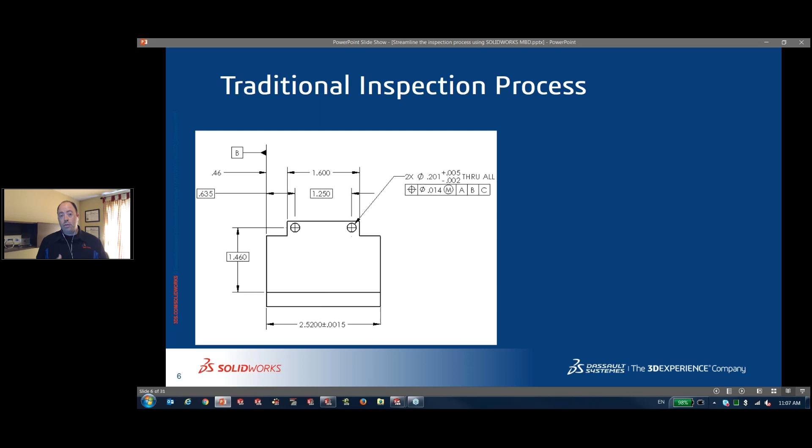So let's start with the first things, which is the traditional inspection process. Now, what does the traditional inspection process look like? So let's say I have this drawing, this 2D drawing, and I want to create a first article inspection report to do the inspection of this document.

So the traditional process is that we're going to go ahead and balloon the drawing, mark up all the dimensions that need to be inspected. I'm going to likely pull out an Excel spreadsheet, start transposing those balloons into the Excel spreadsheet. Then I also need to fill in the nominal values indicated on the drawing, but then I also need to calculate what's the upper and lower limit for each of those dimensions and values.

So now, I've done this for this single view. Mind you that you have to take care of the whole drawing as well. So I've done this for just a view of a drawing. Now I have to do this for the whole drawing.

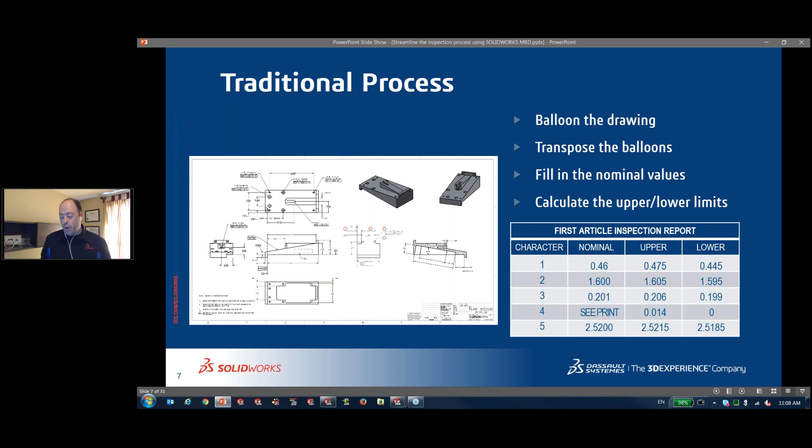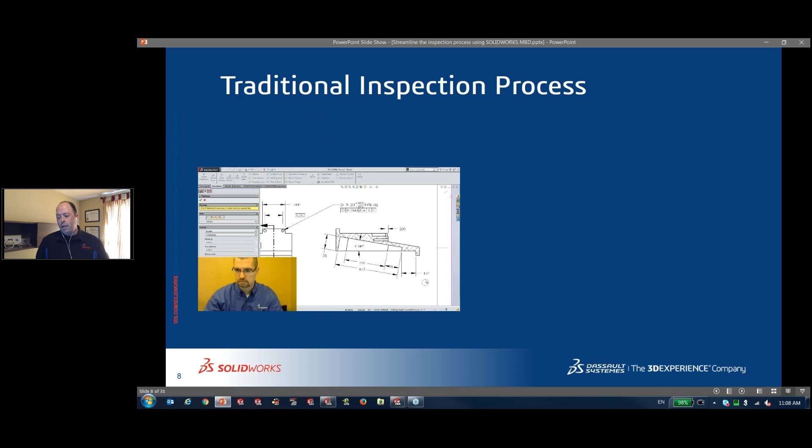And in fact, if you're doing this traditionally and using the traditional manual process, it actually might look like this. This is actually one of my colleagues, Steve Fick, that actually filmed himself doing this process the good old way. So he's inside of SOLIDWORKS, and he's going to be adding balloons manually.

Fast forward a bit, jumps into Excel, starts typing in all of this information. It's all retyping, really, typing things over again inside the Excel spreadsheet, uses the calculator to calculate the upper lower limits of all of those nominal values with the tolerances. Fast forward that a little bit furthermore, completes the Excel spreadsheet, and there you have your Excel spreadsheet, your report ready for the inspection process.

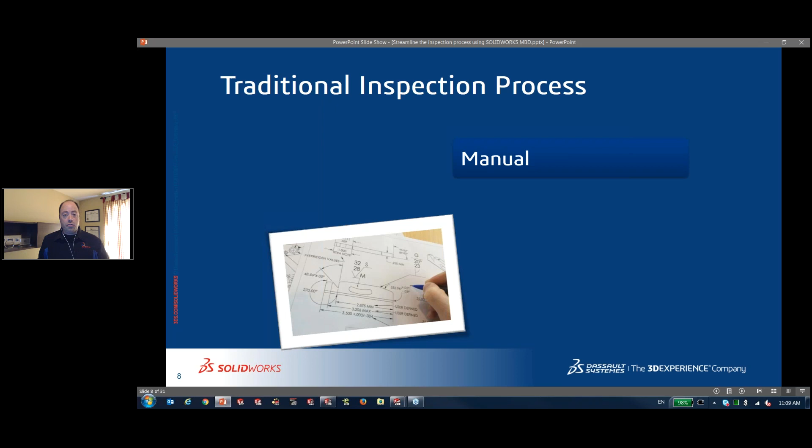Now, again, when you look at this, you realize a couple things. First of all, it's a very manual process. It's very manual labor intensive. So you have to do things manually, circle the, create the balloon, go into Excel, and everything, there's a lot of manual labor put into it.

There's also a lot of error possibly that can happen. A typo when you type in your SOLIDWORKS value, you missed a dimension, you missed something. So it's very error prone, but also it's very time consuming as well.

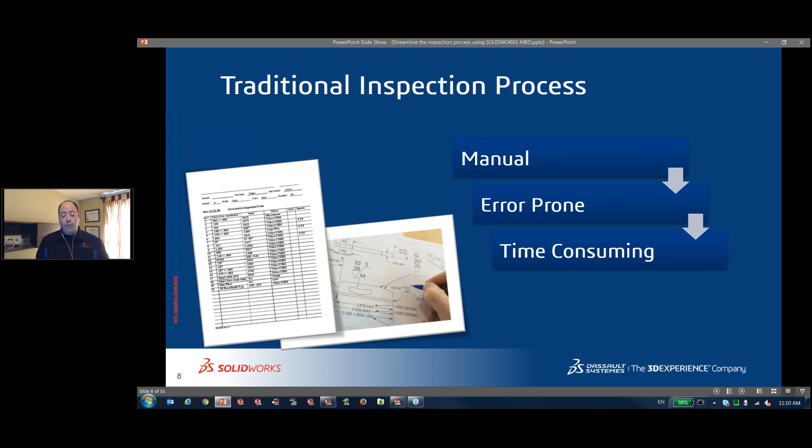In fact, for this example, Steve took about an hour to do a fairly simple drawing and to transpose everything ready for the first article inspection report. So think about that. Spending an hour just to fill in an Excel spreadsheet, and obviously what's time consuming is also costly. You're paying your employee to do that, and it just costs money to do it.

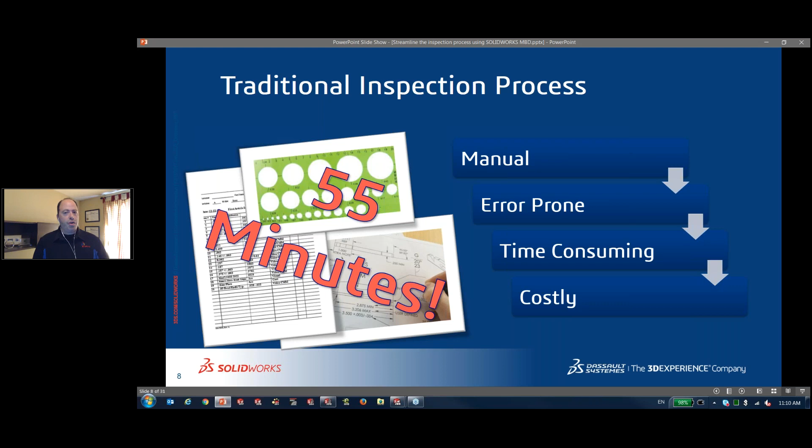Now, this is the traditional inspection process, the manual traditional inspection process. Now with SOLIDWORKS Inspection, you can automate a lot of that. Actually, this is the same process using SOLIDWORKS Inspection. It's not fast-forwarded, it's actually recorded live.

You create a new report, you fill in the information. You don't have to type anything because everything is already in the properties of your SOLIDWORKS drawings. So I'm doing all of this within SOLIDWORKS itself, within the SOLIDWORKS drawing environment. Once I select all the dimensions I want to capture, I hit go. And then SOLIDWORKS Inspection simply goes away and goes at it and populates all the balloons, captures all the information.

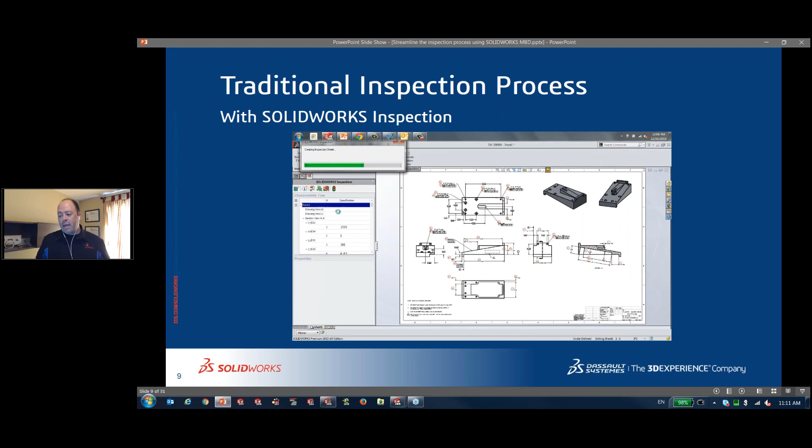The last thing I need to do really is say, okay, I'm ready to export my Excel spreadsheet. And there you have it, that's your Excel spreadsheet. So with SOLIDWORKS Inspection, you can of course immensely automate this process, but it's still a traditional process.

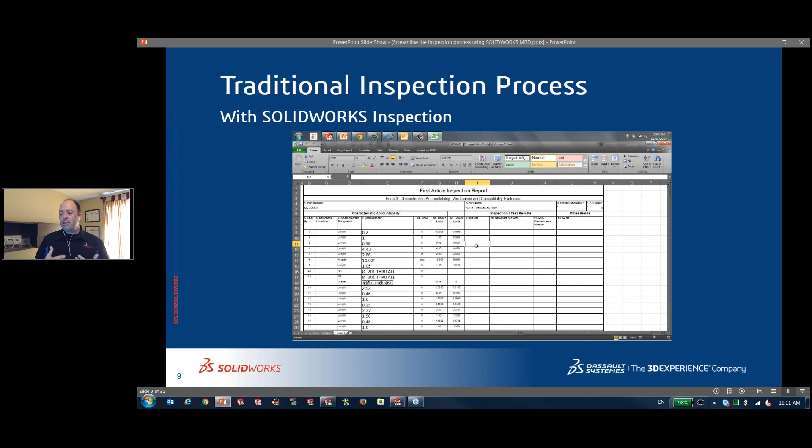So I don't want to talk too much about the traditional inspection process, the 2D-based, 2D drawing-based inspection process. I actually covered that last year in another webinar, so yeah, I'm putting the link there. If you don't have time, or if you missed grabbing the QR code for that, just send me an email, I'll send you the link via email.

But what we learned in this webinar is that, using SOLIDWORKS Inspection, you can reduce your first article inspection report creation by about 90%, which is awesome. It's tremendous.

But at the end of the day, it's still a traditional inspection process, in the sense that you start modeling parts inside of SOLIDWORKS, then you create a 2D drawing, and you cannot start anything before you've actually created a 2D drawing, because you're basing your inspection process off of the 2D drawing, right? So you cannot skip steps there. You really have to go in that order. So keep that in mind. Whether it's manual or it's automatic using SOLIDWORKS Inspection, it's still a traditional inspection process in its wide sense.

Now let's talk a little bit about MBD. So we're shifting gears. Now we're going to talk about MBD, just because some people out there might not know what MBD is, or have not been exposed to MBD yet. So what is MBD? First of all, MBD means model-based definition. We didn't come up with this acronym. It's an industry-wide acronym, and you may have heard it already somewhere else. But really, what does it mean?

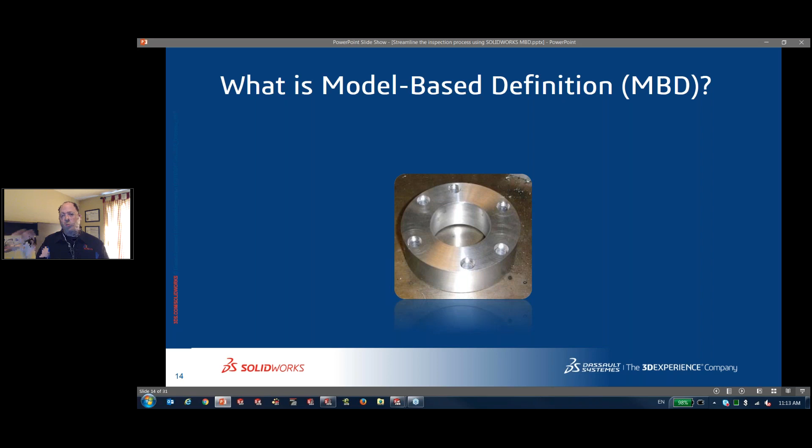Let's say I have this part, and I want to manufacture this part right there. What's going to be the process? Well, first, it's going to start inside of SOLIDWORKS or another 3D CAD modeling tool, and I'm going to model the part. Now, the model alone is not sufficient, because I need some information along with that. I need some dimensions, I need some tolerances, maybe surface finish, GD&T. So I need some information to say how I want this to be manufactured, and this information is going to actually affect the manufacturing process.

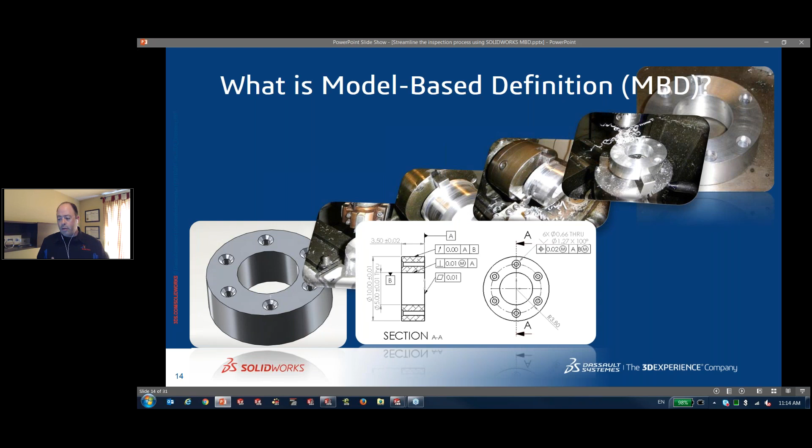And to do that, the process is, well, you create a 2D drawing, and on the 2D drawing, that's where you put all this information. And you see here an example. You got dimensions, hole callouts, you got GD&T, positional, perpendicular, etc. All this information is hosted on the 2D drawing currently, the traditional process.

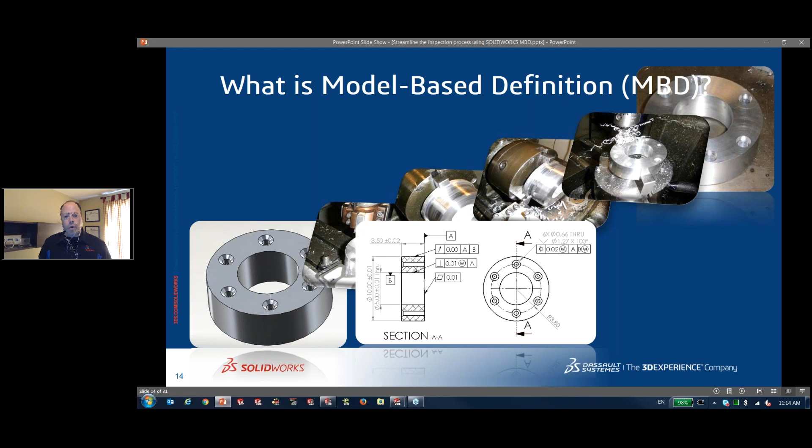The idea with MBD is, instead of having to create a separate file to host all this information, why not just put it into the 3D model itself and host all the critical information in the 3D model itself? And when we do that, we start talking about another acronym, Product Manufacturing Information. Really what PMI is, it's simply the information that's usually on a drawing that now you host on the 3D model. Dimensions, tolerances, surface finish, even bill of materials if it's an assembly. So in a sense, that's what MBD is.

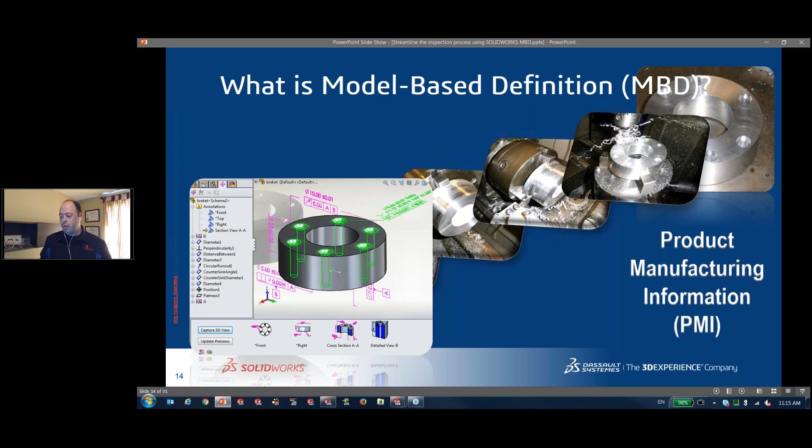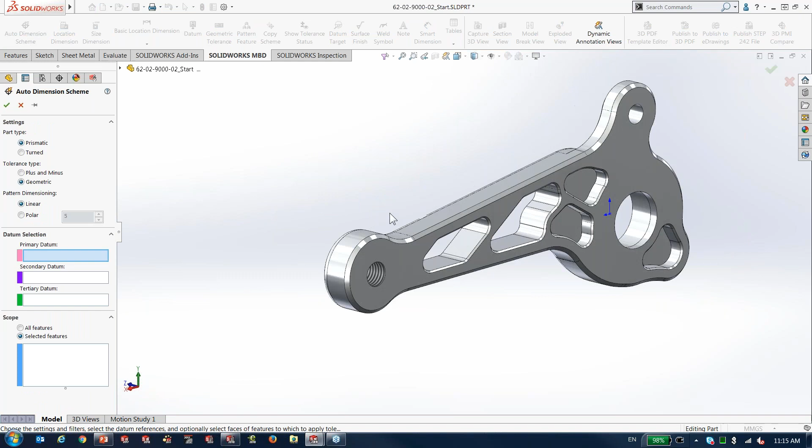Now, let me show you a little bit about SOLIDWORKS MBD and how we can actually do that inside of SOLIDWORKS. So I'm going to switch over here inside of SOLIDWORKS. I'm going to walk through this example here where I have this part, and I want to start documenting in 3D the dimensions and tolerances. So the first step, when you're looking at this, you really have to look at this from the manufacturing process. And from the manufacturing process, you start defining datums. So I'm going to say this is my datum A, and then I'm going to simply zoom into this area. This cylindrical face is going to be my datum B. Now for this example, 2 datums is good.

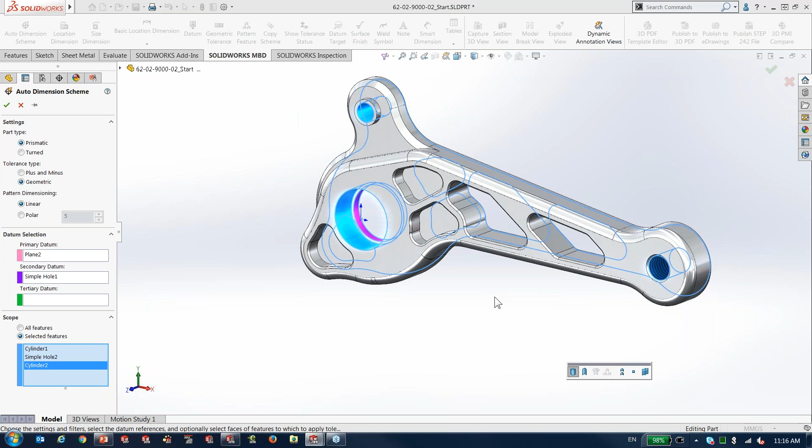And then I'm going to say, what do I want to actually scope out in my tolerances? So I'm going to say, okay, I'm going to use this circular surface here, and that's going to be a cylinder. I'm going to use this hole right there. I also want to define this face right here as well. That's going to be, again, another cylindrical face. I can pick a few more, but for now, let's just say okay. And as I do that, really quickly, I start seeing that 3D annotation on my model. So this is my real GD&T information.

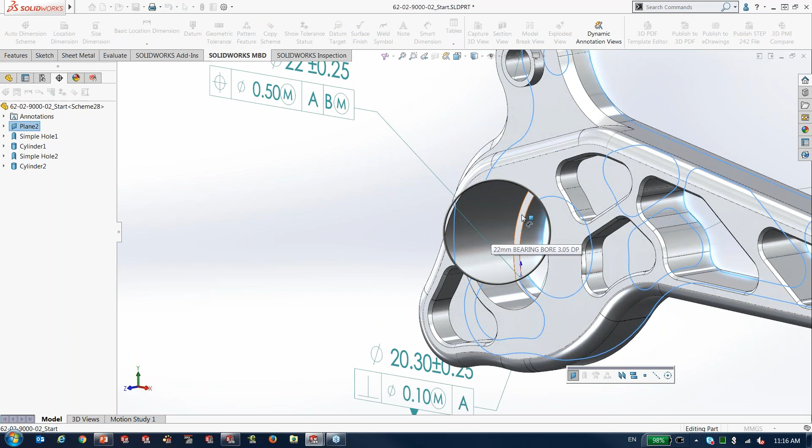Now, I'm not quite done with this yet. I need some more information. So now I can start and go manually at it. So for example, I want to define the thickness between the back face and this surface right there. So I'm going to dimension this right there. I'm going to do the same thing from the face here to the front face right there, dimension that.

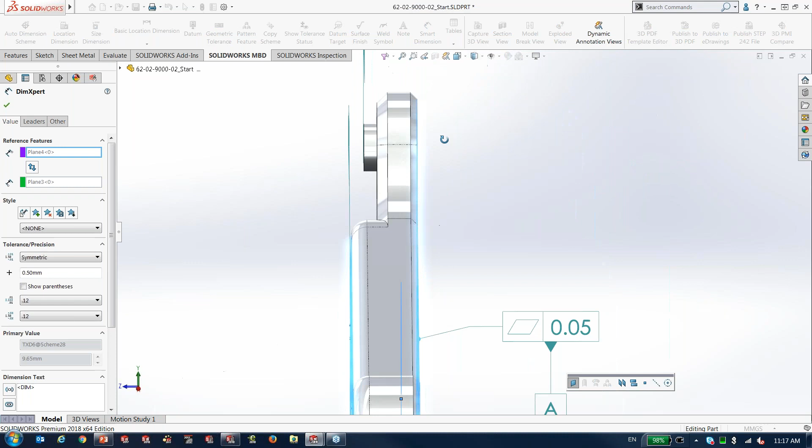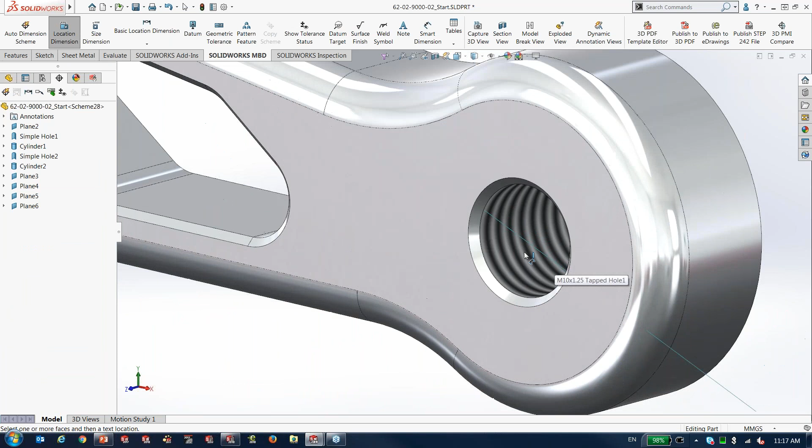I want to add a depth control as well from this face here, maybe to the face right over here, and the same thing from here to this face. So I simply go at dimensioning, as I'm used to, but I dimension that in my 3D model. So very quickly, I got this information. One thing I could probably add to this that might make sense is that I want to define the chamfer here. So I'm going to say I want a size dimension right over here and drop it like so.

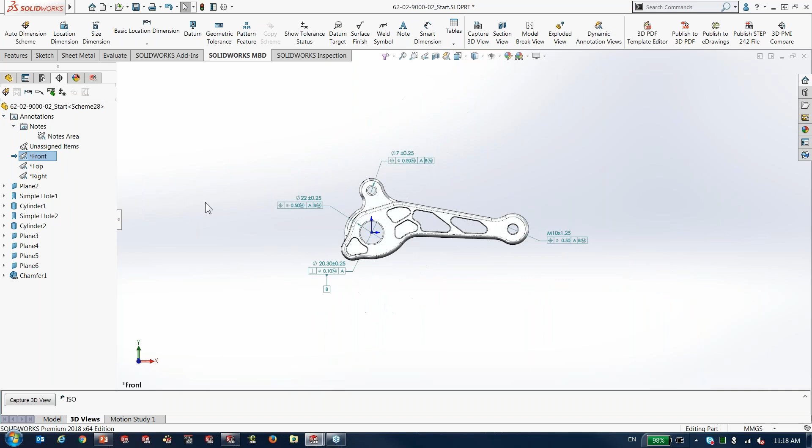So far, I've toleranced my model, but with MBD, you can go a step further and you can say, okay, how do I want to organize all of that information? So first, we're used to having views inside of a 2D drawing, and we can create basically the same approach on a 3D model. So I'm going to be capturing these views simply to help me organize this information a little bit better. Here, let's go ahead and activate the top view.

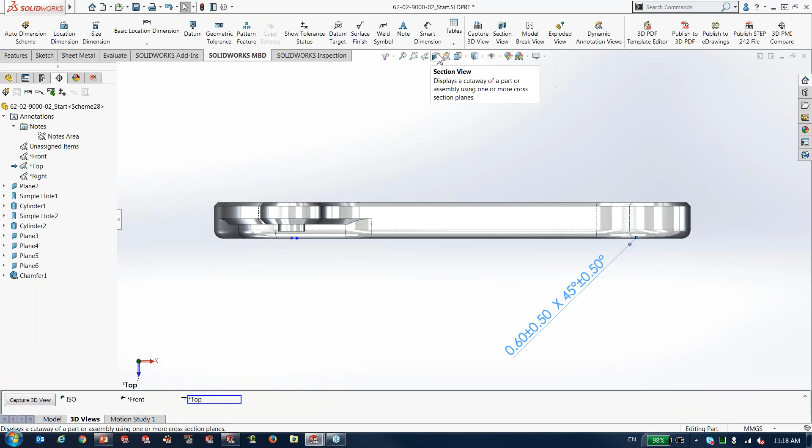Here, the chamfer is kind of a little difficult to see. Probably a good idea, after I capture my top view, would be to create a section view that would actually go into the part and show, at a certain depth, that chamfer really well. So if I do that real quick, I'll say okay to that. Now I can see my chamfer and I could update or recapture this view.

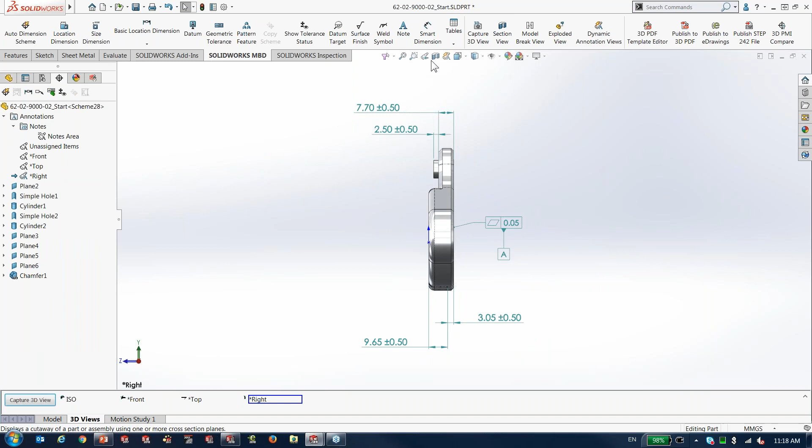We'll do a last one here real quick. I'm going to activate the right view. Again, I'm going to capture this. And like I've done before, I like to have section views to just help me understand how this part is made and better illustrate all of this annotation. So very quickly, I'm able to capture all of this information just like that.

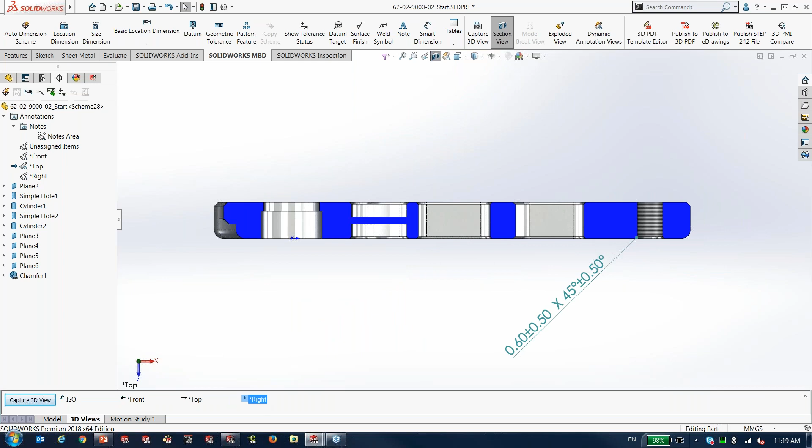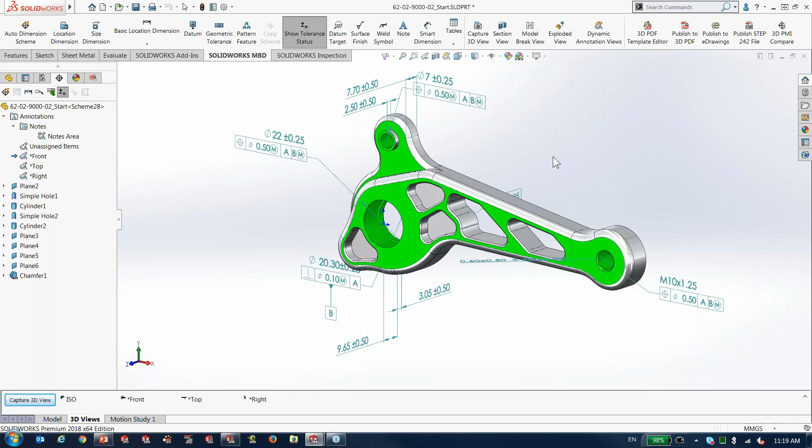So now I've got a couple of views. I've got my front view with this information, the top view, the right view, and I can simply cycle through all of these. One thing I like to highlight as well is the tolerance status check. So very quickly, I get a color code that shows what machining features have been toleranced on this model. And I can see that all my critical machining features, the ones that need a precise fit and perform an actual function, are colored green.

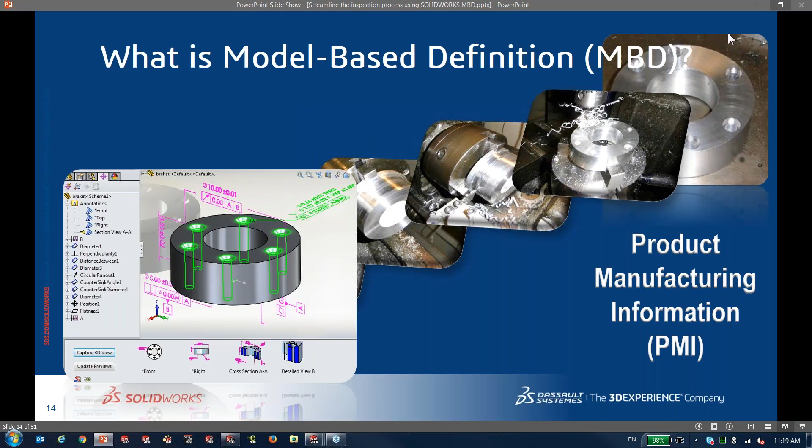So for now, I could leave it like this. I don't need to detail everything, but I'm just detailing the most important critical information. So the idea with MBD, and again, I didn't want to spend too much time because we've done another webinar last year on SOLIDWORKS MBD alone, where we spent about 40-45 minutes just to talk about MBD. But the idea behind MBD is really to help reduce drawing creation, and not only creation, but dependence on 2D drawings as well.

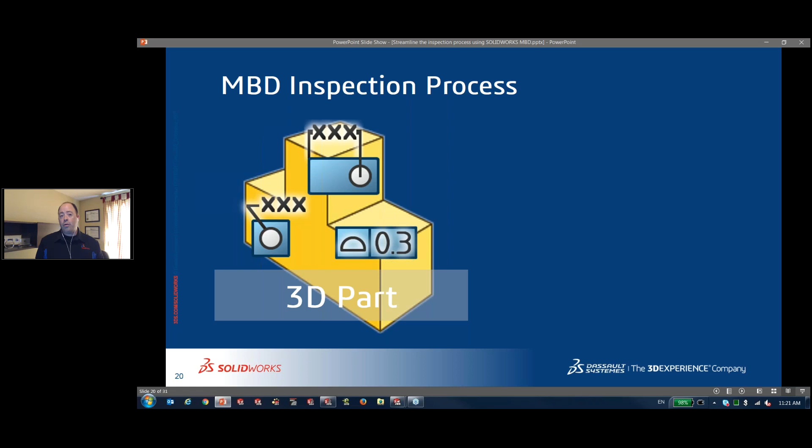Well, the traditional inspection process is still a traditional process. We saw that earlier. It's based off of 2D drawings. You have to do a 2D drawing to get to the inspection process, to do your inspection report. But with the MBD approach to the inspection process, we just learned that all of that 2D annotation can really be hosted on the 3D model directly. So now it begs the question, why do I need a 2D drawing? Or maybe I don't need a 2D drawing anymore. And that's exactly the idea.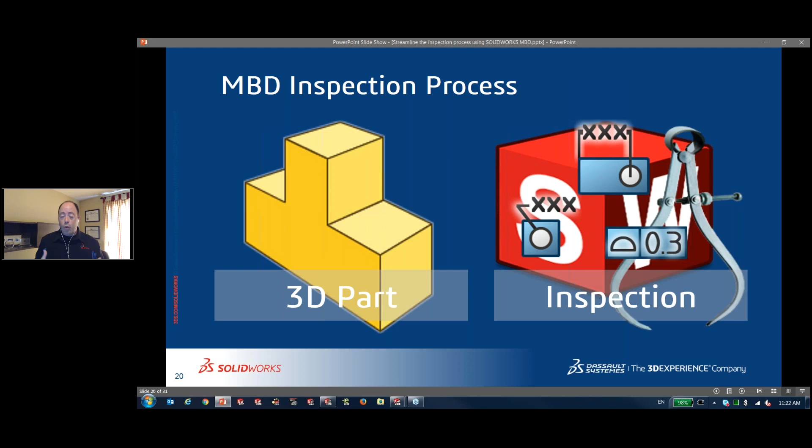Because you have all this information captured on your 3D model, why not just take that information and create your inspection report based off the 3D model information? And that's exactly what I'm going to show you. This is really big with regards to MBD and Inspection 2018, and that's one of the biggest, in my sense, enhancements in 2018. So let's go ahead and take a look at how we would do that inside of SOLIDWORKS 2018.

So going back to SOLIDWORKS 2018, I got this part here, and I'm ready to do the inspection. You see here, this one actually has a little bit more detail to it, more information. But now I'm ready to do the inspection. Very easily, on the top here, I now have a tab inside my SOLIDWORKS parts or assemblies, and then I want to create a new inspection project.

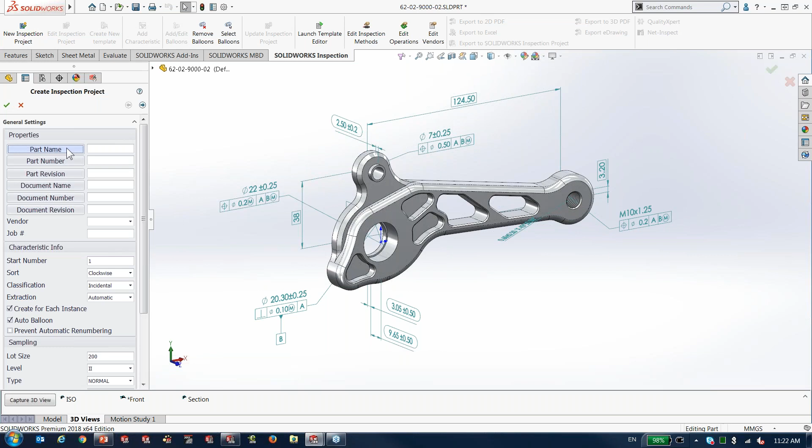I'm going to use a default template, click OK to that, and now I'm going to define some information, but really this is more for reference. Now the beauty is that I already have this information inside of my SOLIDWORKS properties. So it's a simple double click. That's my part number, that's my revision, and there we go.

Now you can define some more information down here, how you want this to be ballooned; even some sampling information can be defined right there. Next step is going to define what I actually want to be ballooned in my inspection document. So now I can select the types of dimensions, notes, GD&T, callouts, etc.

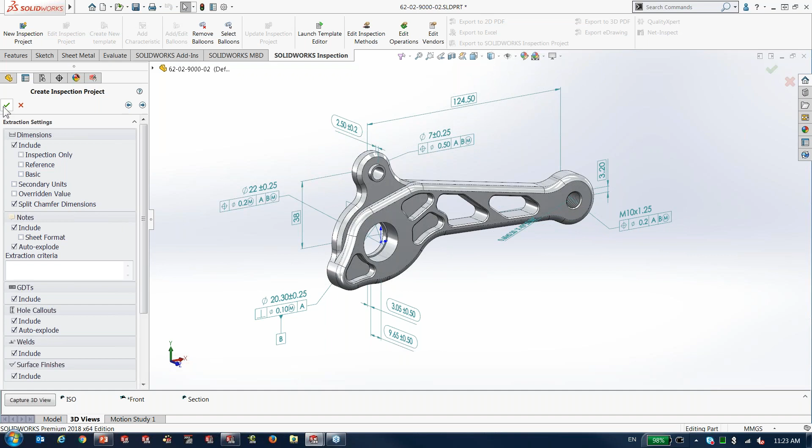When I'm happy with that, I simply click OK, and now I let SOLIDWORKS Inspection create and balloon all that information, gather all that information on my 3D model. So very quickly, I'm actually already done here, and very quickly I've gathered all the information. And if we take a look at some of them, let's go take a look at balloon number 8 and expand that a little bit, you'll see the information.

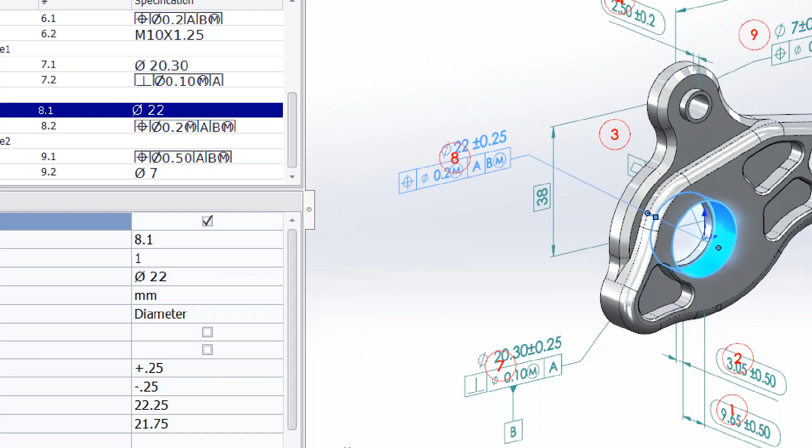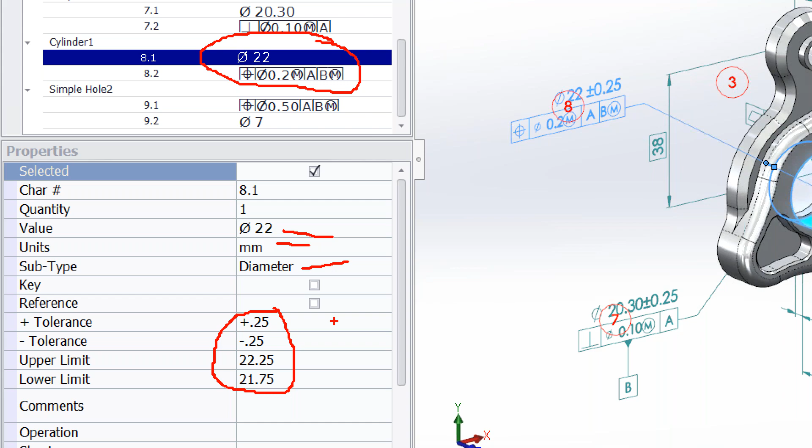So for example, I've got my balloon number 8, that's 22 millimeter with a positional GD&T attached to it. SOLIDWORKS Inspection understood the diameter, the unit, it is a diameter, the dimension, but you see here, it actually went ahead and captured the plus minus, and then captured and calculated for me the upper and lower limit for this dimension. And mind you, it did that for all of the dimensions on this model.

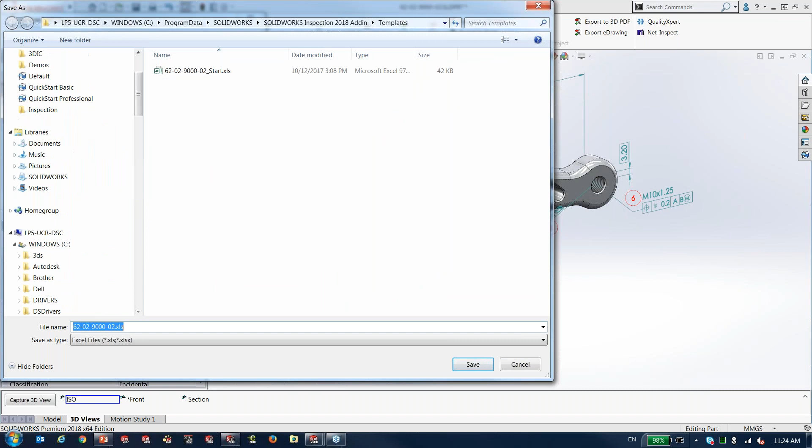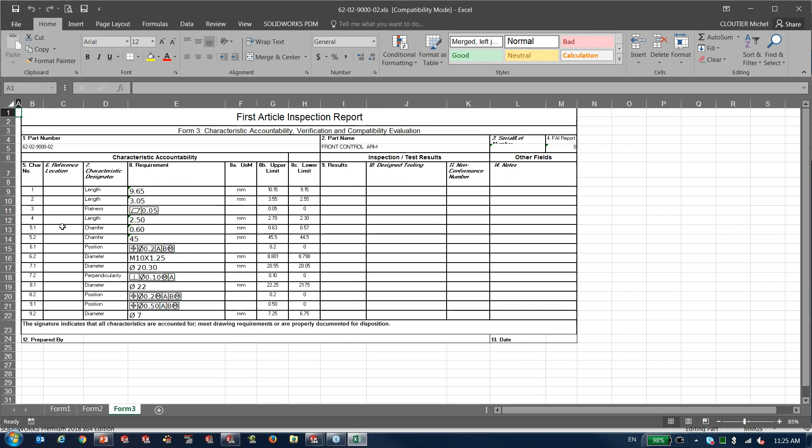So now the step is very simple. I want to export my Excel spreadsheet to create my first article inspection report. I'm going to, from my template, select which I want to use. I'm going to use this one. I'm going to click OK to that and actually overwrite my existing report I've done earlier today. Save that, say yes to overwrite. And in a matter of a second or two, I've got my full inspection report ready to go.

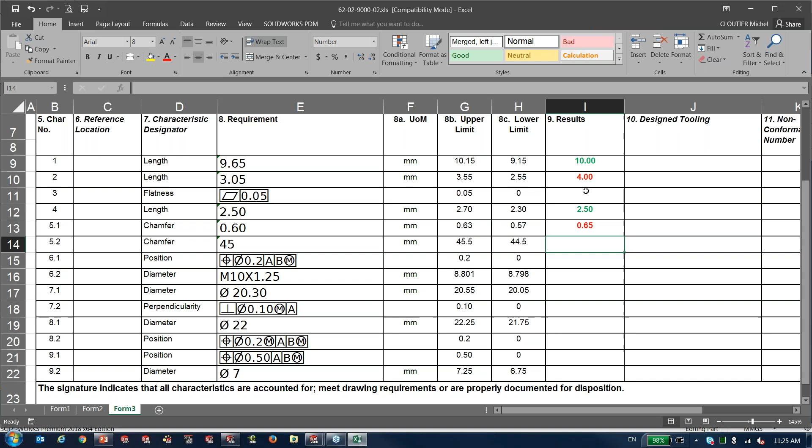And this is an Excel spreadsheet. So from this time on, you can simply send the Excel spreadsheet to your quality engineer, and now he can simply go ahead and measure on it. And also there's some color code built into it. So if you start typing in your values, if you're within tolerance, it'll show green. If it's out of tolerance, it'll show red. So just some visual cues when you start filling in the information and measuring the actual values for all of these.

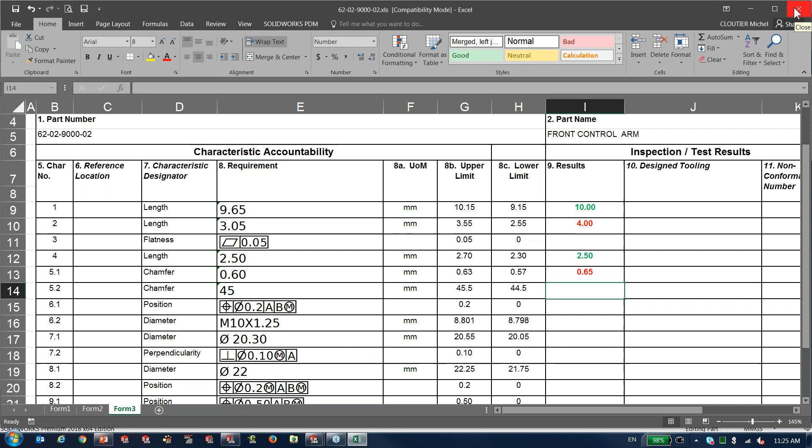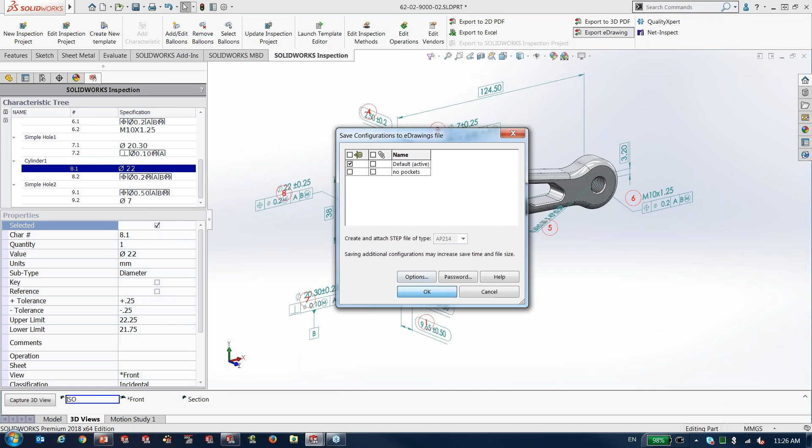Now, sending the Excel spreadsheet alone might not be sufficient. You probably want to have your quality engineer be able to actually view where the balloons are on this model. Well, there's actually a few options to do that. We can export a 2D PDF, a 3D PDF. Here, let's go ahead and export an eDrawing. And again, I'm going to override the existing one, click OK to that, and it's going to capture my eDrawing. And then we're going to take a look at that eDrawing.

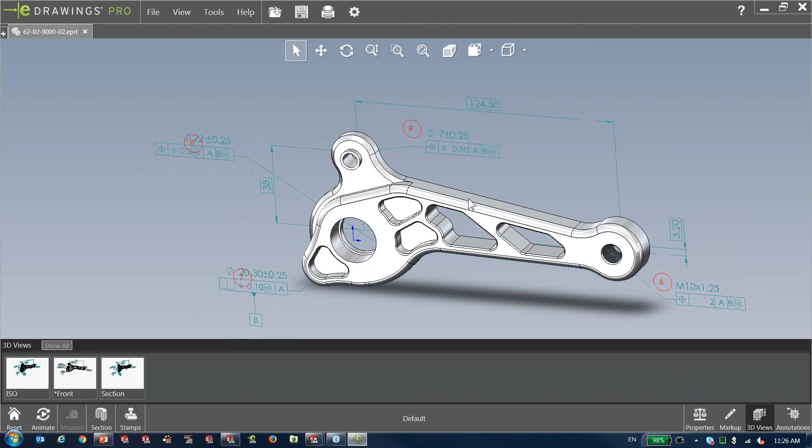So now you have a lightweight eDrawing model that you can send down to the shop floor. You'll notice that I have my views here, so I can navigate in my views with all the information. What's nice also about eDrawings is that when you select a dimension, it actually cross-highlights on the screen. So if you're not sure about this dimension or that dimension, you know exactly what this is for, what feature it is attached to. So it makes everything really easy to understand all of this critical information.

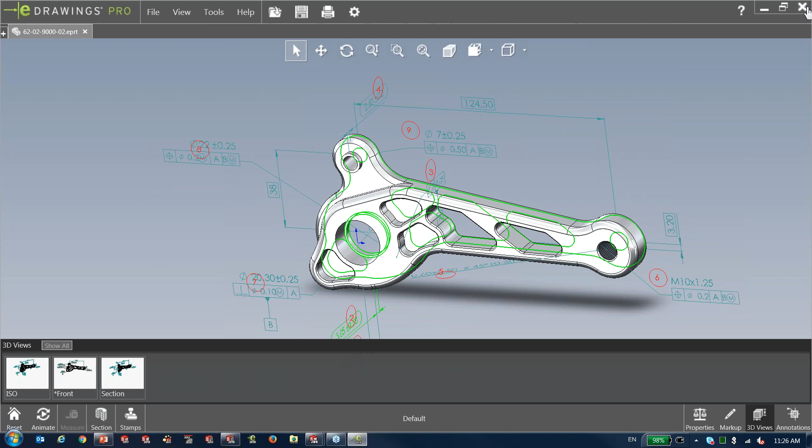So that's really the idea with how we can start to streamline the process. So that's where MBD comes into play with regards to inspection. So you saw that you can still do the inspection the traditional method, the 2D way, but with MBD, we can basically skip over having to create a 2D drawing or delay that process. You might still need to create a drawing, but you can delay that process a little further.

So the other thing too is, if I continue with this in mind, what happens if I'm getting information from my customers? So your customers might actually start to send you some MBD models, some MBD information. So if they're sending you a SOLIDWORKS part, that's great. You use SOLIDWORKS, you can do that. You just saw that. I just did it with one of the models. But what if they're sending you CATIA V5 files, or Pro Engineer files, or even STEP files, or other types of formats? What do you do with those? So let's see how we can tackle this task using some other files.

So this time I'm going to actually go into SOLIDWORKS Inspection, the standalone. Now you saw how SOLIDWORKS Inspection works inside of SOLIDWORKS. Let's take a look how it works if you don't have SOLIDWORKS installed or if you're getting other types of data. So using the SOLIDWORKS Inspection standalone, I'm going to create a new project and select a template, much like I've done before inside of SOLIDWORKS.

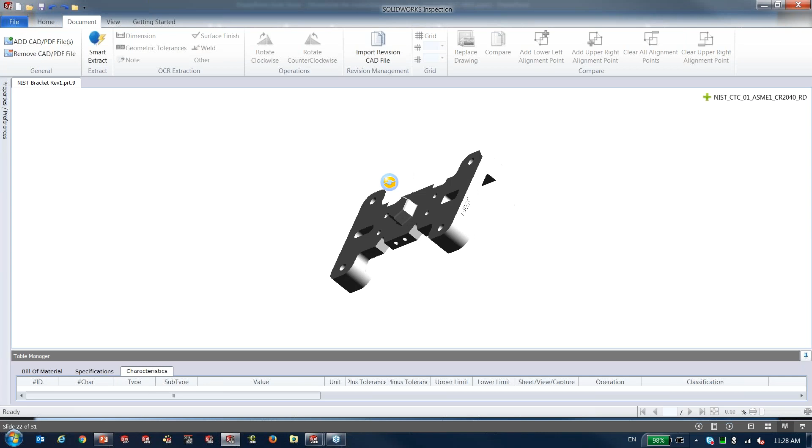And now I'm going to select what file I want to use. So here I got a part that's actually a PTC Creo part, a .prt.9. And I'm going to open that, and it's a 3D part. It's a 3D model. So as it's opening inside of SOLIDWORKS Inspection, you can see that I can navigate this 3D model, much like you can navigate a 3D model inside of SOLIDWORKS.

But if I go into my default view here, you'll notice I have a number of dimensions. So not only the geometry comes in, but also all the tolerances, all the dimensions, they're there. So now how do I start capturing that information? Well, very simply. Inside of Inspection 2018, we now have a Smart Extract.

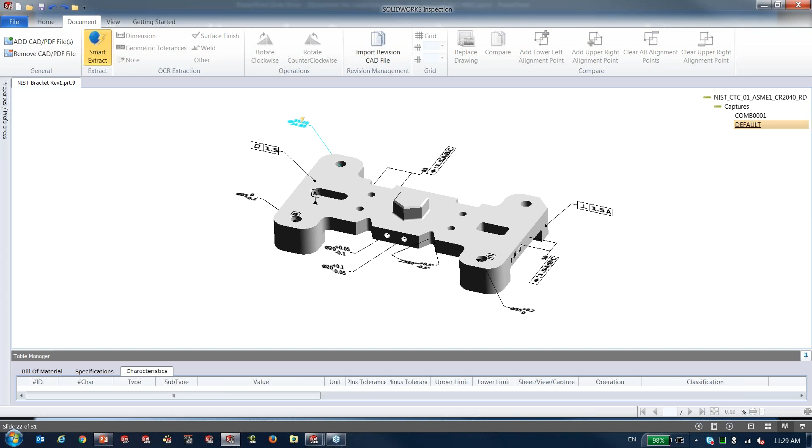So just by selecting the Smart Extract and selecting one of the dimensions, I'm going to zoom in over here and I'm going to select this one. I select it, and very quickly you'll see on the right hand side it actually started capturing this information. It knows it's a dimension, a diameter, it's in inches, there's one, calculated, captured the values as well.

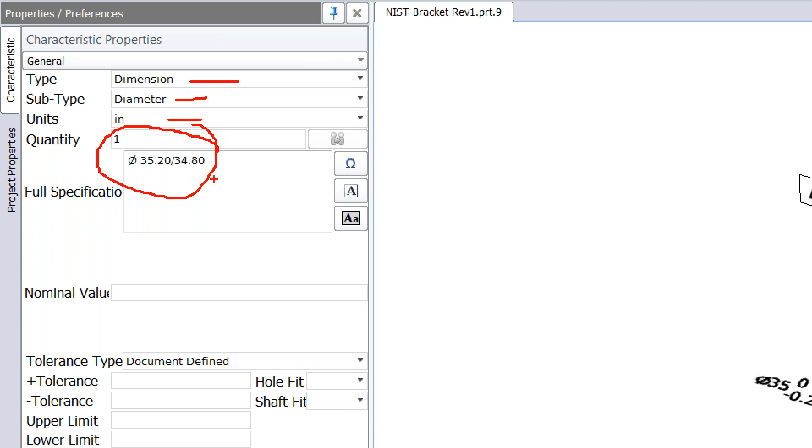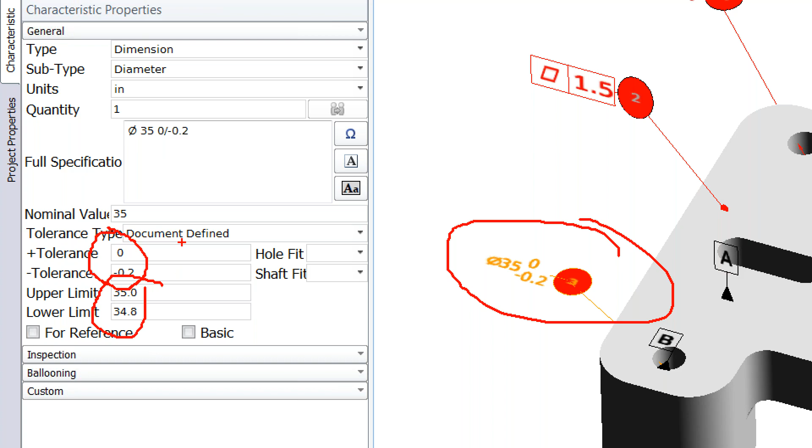So the information is already captured, and now I can simply go ahead and select one at a time all my dimensions I want to capture. Again, if I zoom in into this one here, which is my balloon number 3, notice that it captured the tolerance of 0, -0.2, and then calculated the upper and lower limit for that dimension as well. So all of that information is captured automatically.

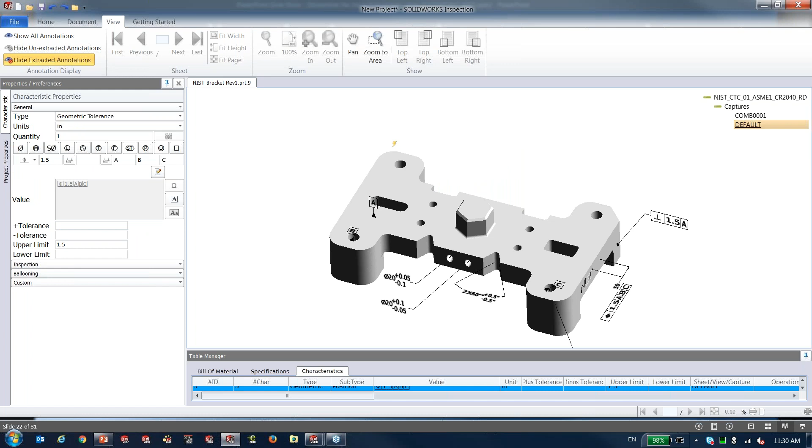Now I'm doing this manually, but really you might want to automate this process a little bit. One thing I like to show is that as I'm doing this, I can actually hide my extracted dimension. So it's just a simpler way graphically to capture the information. So as I'm selecting, it disappears from the screen.

And again, I can show them over here, but if I want to do this quick, I can simply window select the whole thing. And there we go. All the dimensions are captured. If I expand the bottom here, you'll see all the information is captured in my bill of characteristics down there.

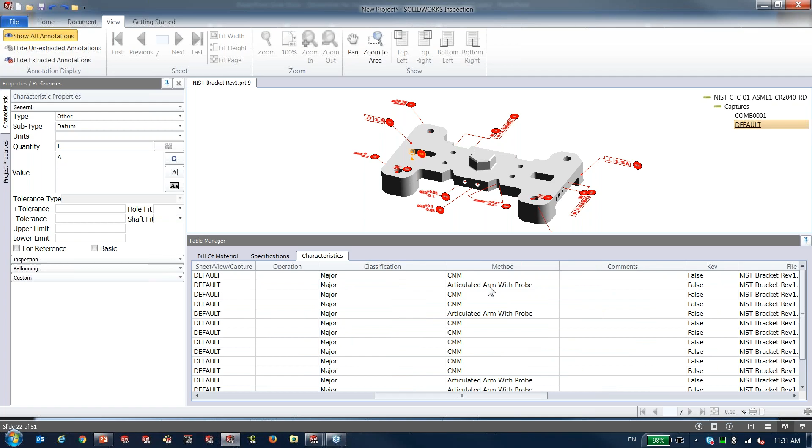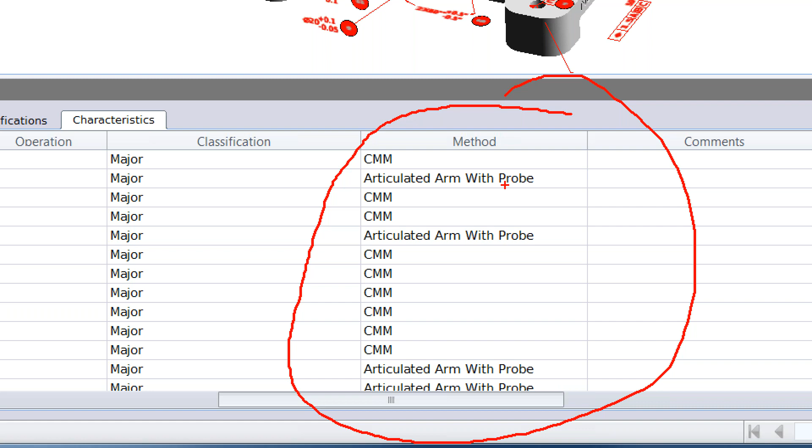Some of the new functionality we've added in 2018 is that now we can also define a default method of inspection based on the type of capture. So if it's a dimension, here I set it to use the CMM. If it's a GD&T, like a surface profile tolerance, things like that, I'm using an articulated arm with a probe. So all of this information just to automate the process.

But at the end of the day, the thing I'm going to want to do is to create my Excel spreadsheet for the inspection process. And right from here, I'm going to select which template I want to use. I'm also going to be able to define some more options. So for example, I want to capture a screen capture of the 3D dimensions on it.

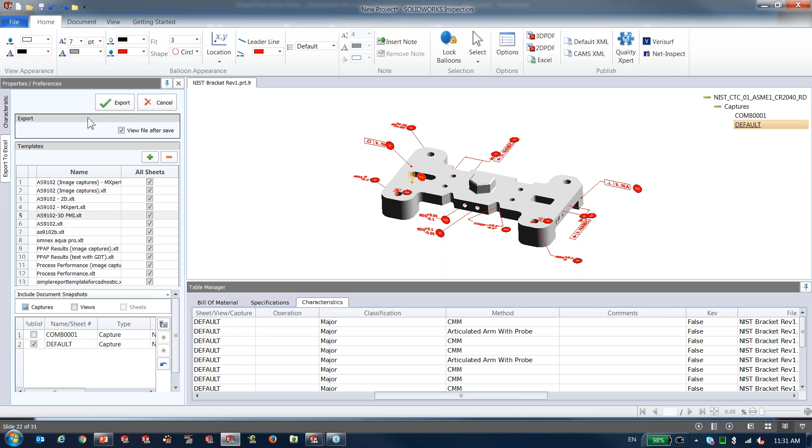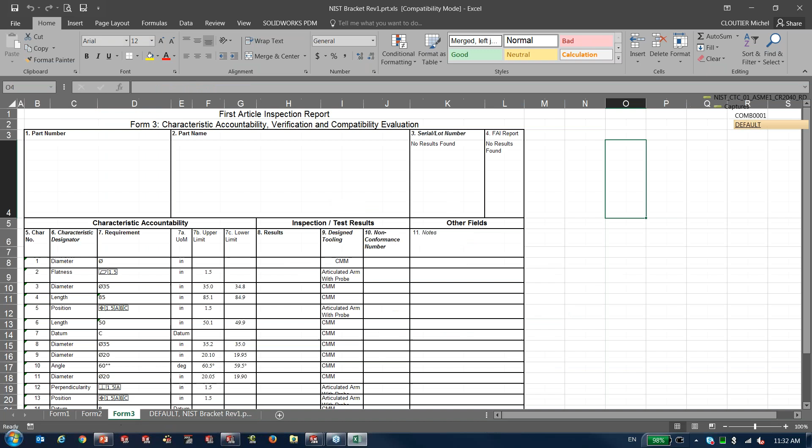So very quickly, I create that Excel spreadsheet, it saves, I'm going to overwrite the old one, and in a few seconds, you'll see the new Excel spreadsheet right there. So you'll notice that this is actually the Excel document. There's a tab down the bottom that shows the 3D model, but then if I go on form page number 3, you'll notice that all the information is in my Excel spreadsheet right here.

And again, now I can start filling in my information with some controls, like a visual cue that says if I'm within my tolerances or outside my tolerances as I'm typing in this information.

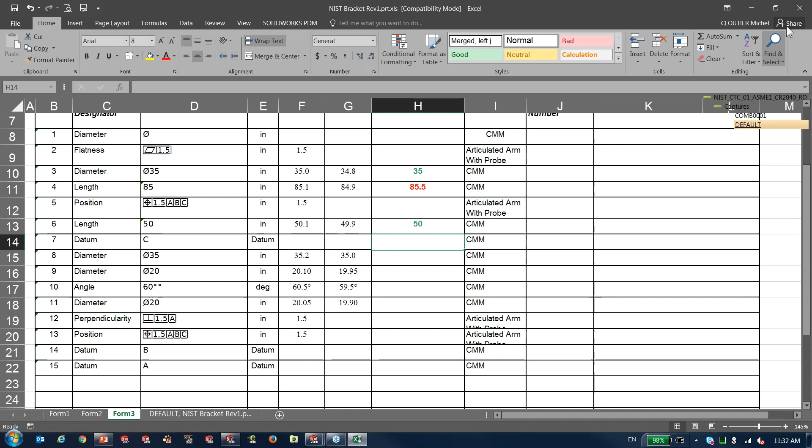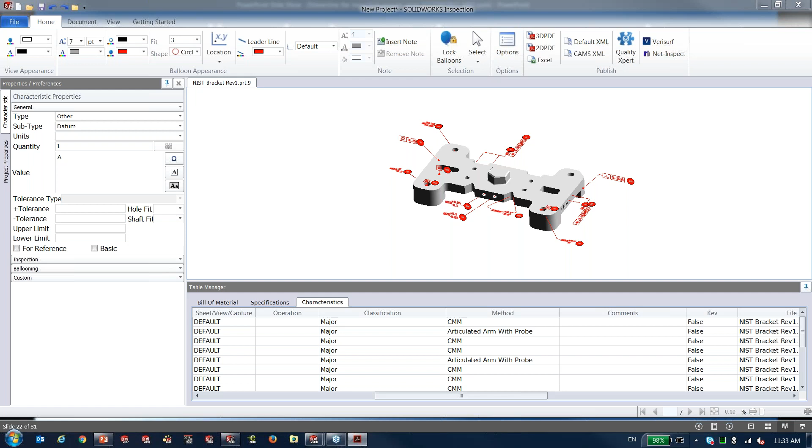Now that's all great. From here we can also export and attach. Like I said earlier, I used the example of a 2D drawing, but another example is the actual 3D PDF of the ballooned drawing. So again, I'm going to create one right here and now. It actually opens up on my other monitor. So let me just grab this and move it back to this monitor so everyone can see.

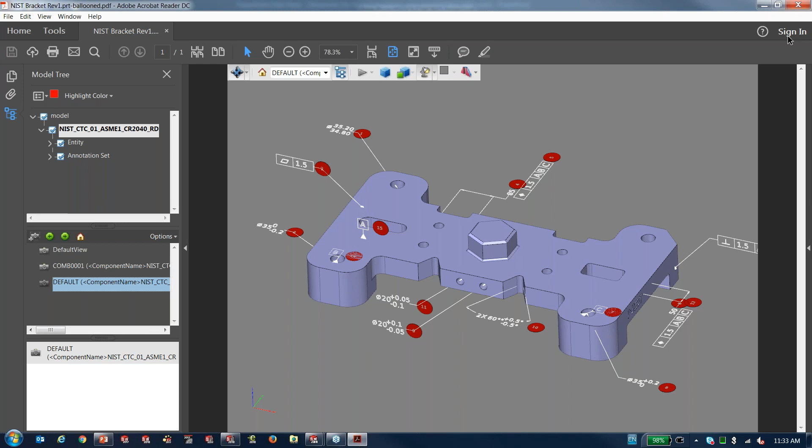And now if I go to my default view, you'll notice that all the graphical information is there along with the balloons. So the 3D PDF could be sent or used on the quality inspection floor along with the Excel spreadsheet, and now you've got all your documentation ready to go and all the information for your inspection is there.

So as a closing note, I want to talk about the file formats, because there's a number of formats we support with SOLIDWORKS Inspection, and I should be precise, this is Inspection 2018.

We do support new 3D formats in 2018. So we support CATIA parts and assemblies, 3D XML, which is also a file CATIA can export, used in some processes, and also PTC Creo parts and assemblies. So all of those 3D formats, along, of course, with the SOLIDWORKS format, we do support.

But we also support a number of 2D files, and we've added to this list this year as well. So we could support in 2017 PDF and TIFFs, but now we can support DWG, DXF, CATIA drawing, and even UGNX drawings, which are .prt extension.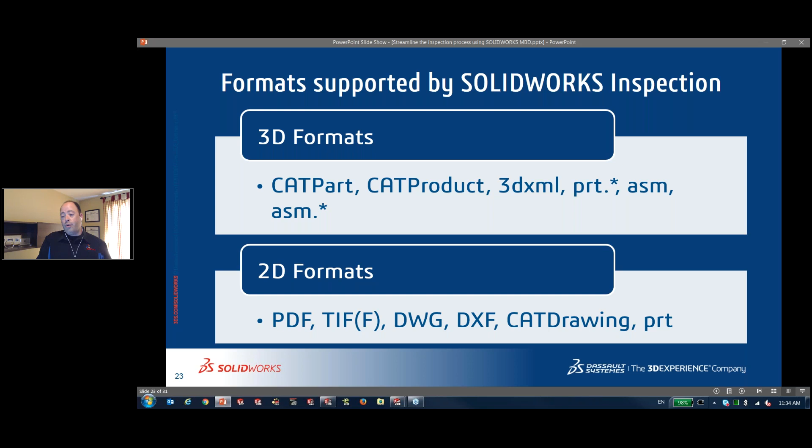So really, what's the good thing here about SOLIDWORKS Inspection is whether you're still doing the traditional 2D drawing-based inspection process, or whether you want to do something different using the 3D format, SOLIDWORKS Inspection is going to be able to do that. So it just gives you a tremendous amount of flexibility with regards to the process.

Most people are still doing the inspection process in the traditional way, the 2D drawing-based inspection process. And if that's what you need, great, SOLIDWORKS Inspection can do that. But if you want to do things differently and you want to use maybe the MBD model to create your inspection process and streamline the whole process, well, again, SOLIDWORKS Inspection 2018 can definitely help you do that.

Now, the last thing I might want to touch on is what happens if there's a revision on my 3D model and I need to update my first article inspection report. And you just saw me do the inspection report off of this part. What happens if the customer sends me a revision and says, hey, please update your inspection process?

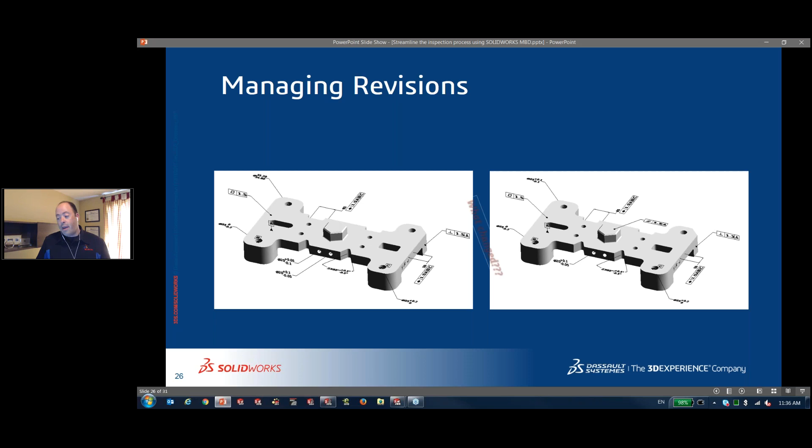Now the keen eye there, some of you might actually have noticed a few changes, but really the big question is what changed? Some things can be drastic, some things can be very hard to catch. Maybe you just changed the tolerance on the dimension. How do you find that? You have to go through and really be careful of it. Well, SOLIDWORKS Inspection can also help you in that process. Let me show you something real quick.

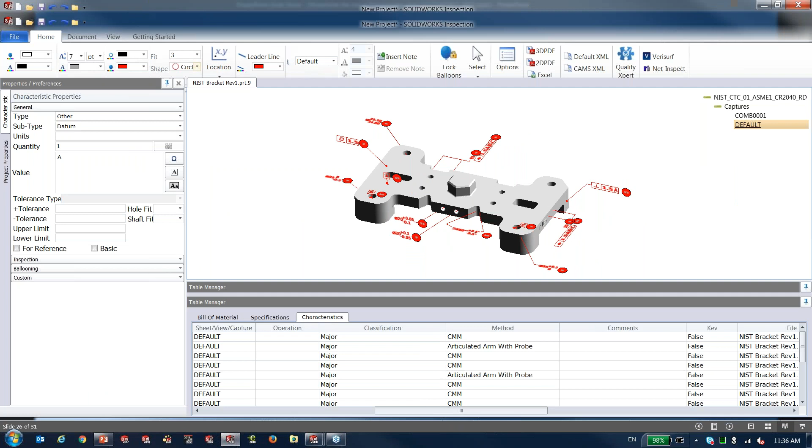So going back again inside of Inspection, we're going to walk through this step. I got a new revision. What do I do? Well, from my document tab here, I got the option to import a revision CAD file. I'm going to save my project before I go too far into it. And I'm going to select my revision. So this is my revision 2 file I just got from my supplier. I will say open to that.

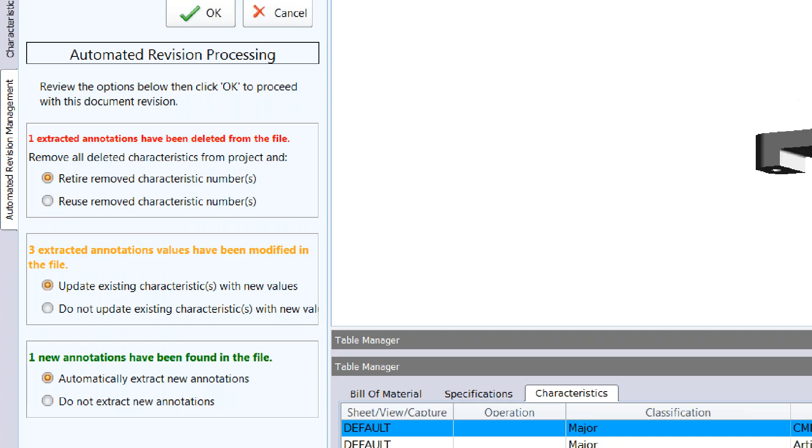And now SOLIDWORKS Inspection is actually telling me, hey, it has detected some changes. How do you want to proceed? You want to do the automatic or the manual revision method? Well, in this case, let's go with automatic. I'll click automatic, and there we have it. Very quickly on the left-hand pane, I can see that there are some changes. Some were deleted, some were modified, and some are new, right?

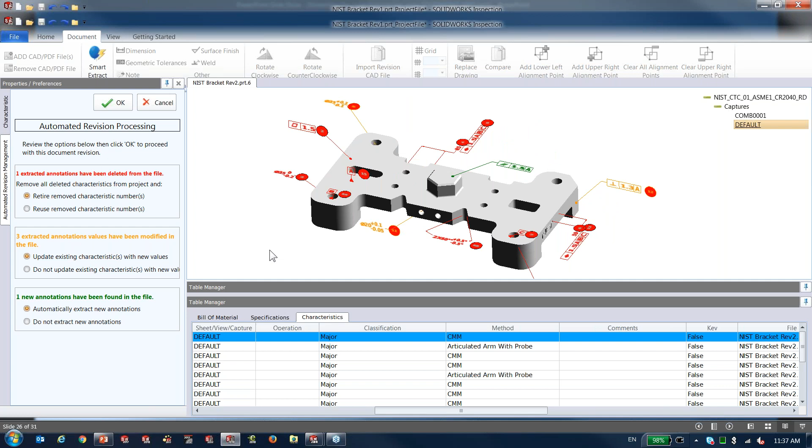It says right here. Now, if I want to see them on the 3D model, I can simply navigate to my view here that has this PMI information, and you'll notice that there's also a color code on the screen on the dimensions that have changed and the ones that are different. And if I start cycling through my bill of characteristics, you'll see some of them highlighted in orange, meaning they're changed, some in red, meaning they've actually gotten removed.

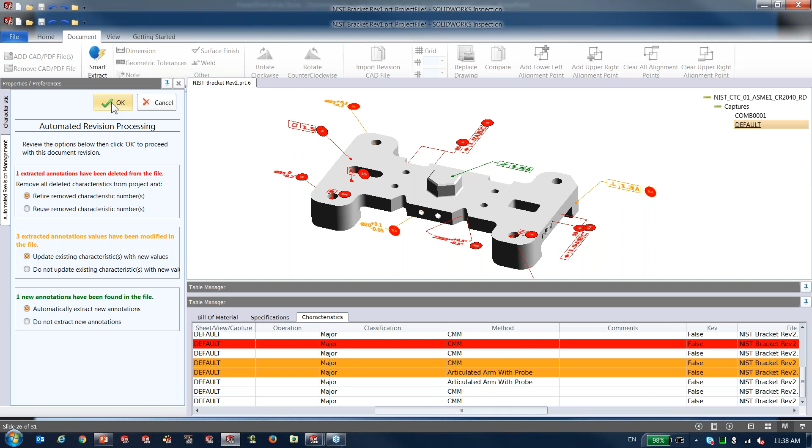So how do I go about updating this? Well, I use the automated revision processing, so I'm simply going to say OK, and you'll see that it's going to actually update my bill of characteristics with all the new information. And one of them, the last one here, item 16, wasn't there before. So you can see that it was added to my bill of characteristics right down here.

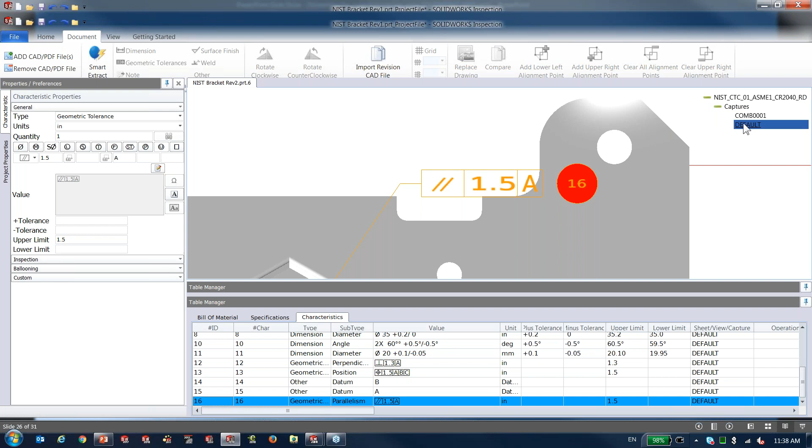So what would be the next step to do? Well, fairly easily, you can probably guess that I would simply create an Excel report, recreate my report, overwrite my 3D PDF or create a 2D PDF if I want to, and then I'd be on my way.

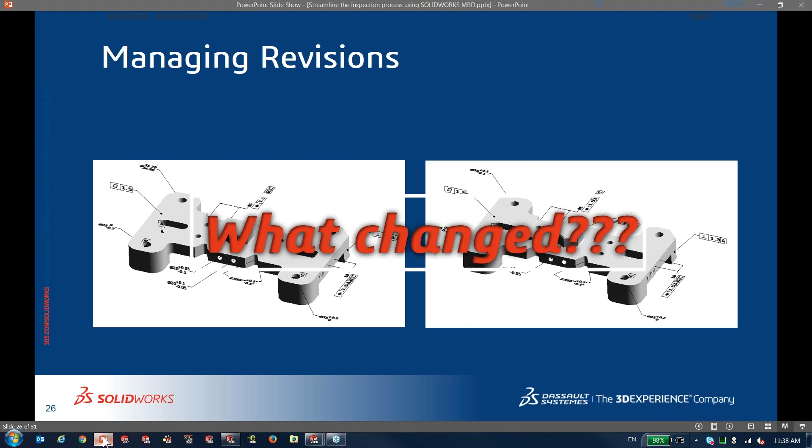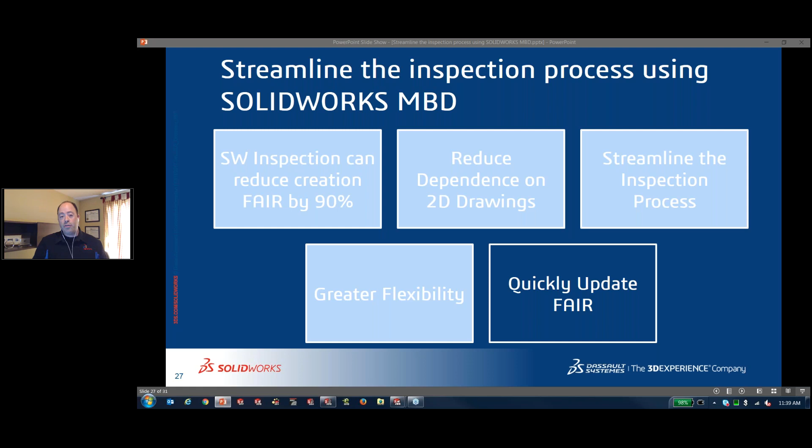Managing revisions of files and article inspection reports is very easy. I showed you the tool to compare PMI in the 3D world using 3D annotation, but we also have the same tool if you're using a traditional approach with a PDF or a 2D drawing. We have the compare 2D drawing tool built inside SOLIDWORKS Inspection, allowing you to quickly update your first article inspection report. You simply say update and republish your Excel or PDF file.

So this is what I wanted to cover today. We talked about the traditional inspection process and how SOLIDWORKS can automate it, but it's still based on a 2D drawing. When we talk about MBD, the purpose is really to reduce dependence on those 2D drawings. You might still have to create one, but maybe just a little later, and that's fine.

With both these tools, you can really streamline the inspection process. You don't need to create a 2D drawing just to get a first article inspection report. You can go from your 3D model, which you already have, add annotations on top of that, and go directly to the inspection report.

With SOLIDWORKS Inspection, you saw how flexible it is. We support either the traditional method with 2D drawings or the 3D model approach with 3D annotation and PMI. The last thing I showed was how you can quickly update your first article inspection report if you get a revision. I showed the example in the 3D world, but if you want to see this tool applied to a 2D drawing, check out my past webinar on inspection.

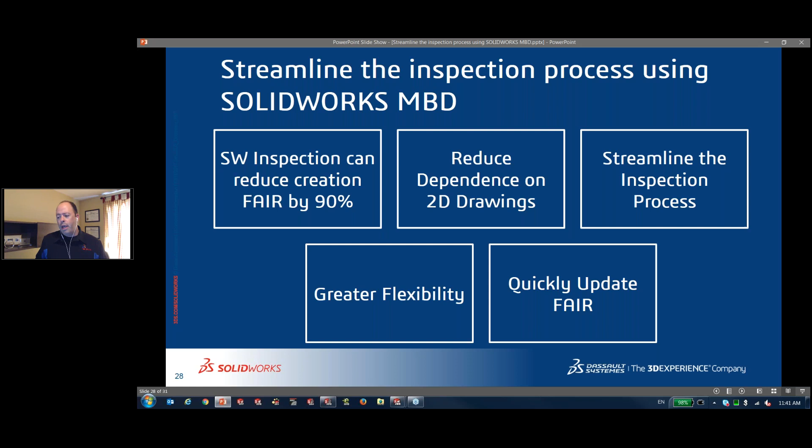So this is really what I had for you in store today. Maybe one last thing before we sign off, and I'll let Joel do the final signing off.

Next week we're shifting gears and talking about plastics. This week our topic was inspection. Last week we started talking about plastics from a designer's point of view, looking at tools inside SOLIDWORKS and SOLIDWORKS Plastics to understand if you're going to get a good quality plastic injection part. Next week we're going a step further, talking about mold cooling, how we can analyze the cooling of a mold, and also predict warpage on plastic parts.

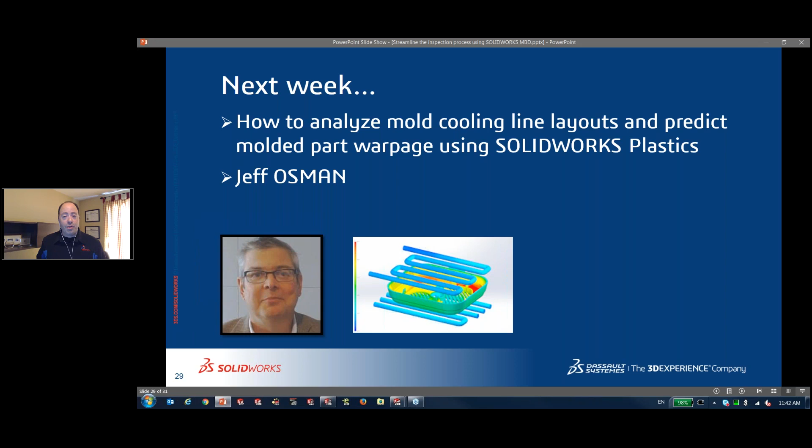This session won't be hosted by me personally. I'll be on the call, but assisted by one of my colleagues from Chicago, Jeff Osman, who will be connecting and presenting these advanced tools. We're going to do that on the 20th at 11 o'clock.

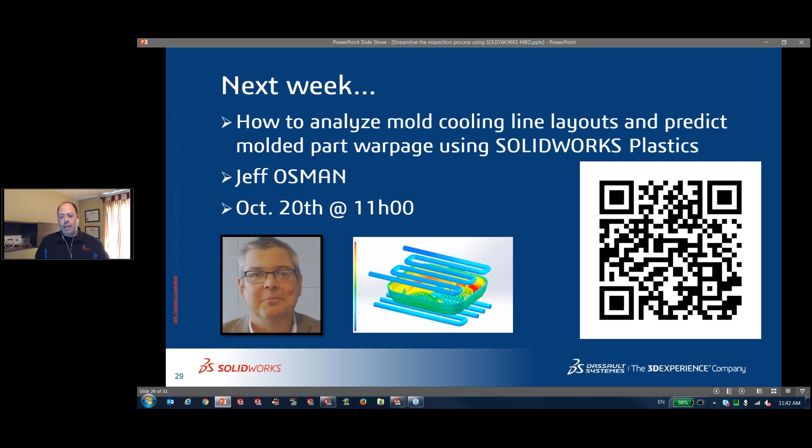Wonderful, thank you Michel, that was great information. Two great products now talking to each other, enhancing what you can do, either inspection on its own or how you can carry your 3D model further into MBD. Start thinking about how that can affect your business and how it could simplify life. A lot of things to think about with MBD, a lot less to think about with inspection.